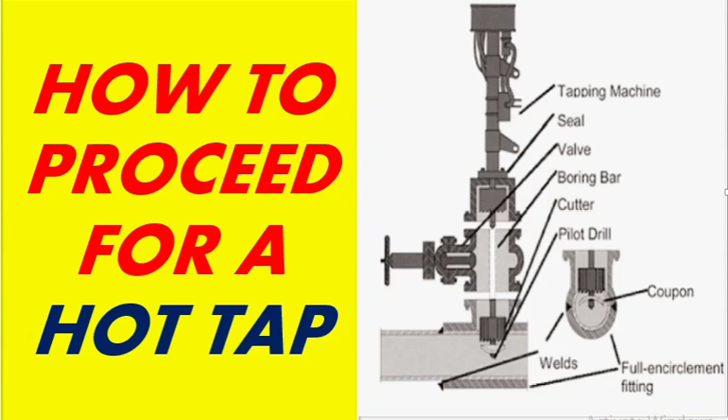So this is stopple split tee. We are using specialized fitting with dimensional requirement to suit stopple plugging head. A regular full size split tee will not be acceptable. And the third is the very important sandwich valve.

What is sandwich valve? A special gate valve with a short face-to-face dimension. One special gate valve to stop the live condition or the flow to the other area. They are also used for hot tapping when the connection will only be used temporarily and when the reach of the hot tap machine is insufficient to complete a hot tap through a conventional valve.

This valve cannot be operated unless the pressure is equalized across the gate. So pressure should be equalized across the gate. Then only we can use that valve. So this is sandwich valve. You can see this one, the sandwich valve.

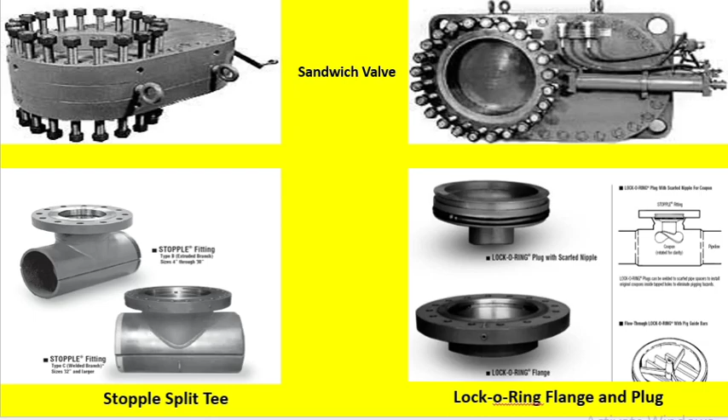So these three things are important in the hot tap. One is the lock-o-ring flange and plug. Second is the stopple split tee. And the third is the sandwich valve. These three are very important. What are they used for? You can see here, it's mentioned.

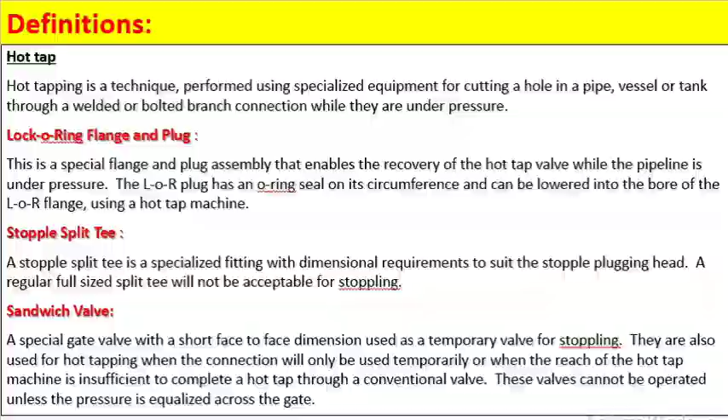So step one, you are an inspector and you are doing hot tap. What is step one you have to check? Step one is the initiating organization shall prepare a design package for each hot tap that will include fully dimensioned drawings, a material list and welding procedure. Definitely this step one is very important. A design package should be there in hot tap.

In this design package, what will be there? One should be the fully dimensional drawing of each material like gate valve, split tee, or lock-o-ring, everything should be there. And also the hot tap area, in which area you have to do hot tap, that dimension is also very important. So everything should be there in the drawing.

Second is the material list. What are the requirements before you are doing the hot tap? There should be a material list. And third is very important, welding procedure. How to do the welding there? The welding procedure approval should be there definitely. If it is Saudi Aramco, the approval should be there from the CSD. So the welding procedure is very important.

So three things are very important. One is the dimensional drawing, second is the material list and third is the welding procedure. So this is the requirement of step 1.

Step 2, what do you do? Inspect and determine the minimum pipe wall thickness at tie-in weld areas by continuous UT scan along the line. So you have to check the thickness of the pipe at the tie-in weld areas. Where is the tie-in weld? In that area the pressure will be increased or decreased. So definitely the pressure will be increased.

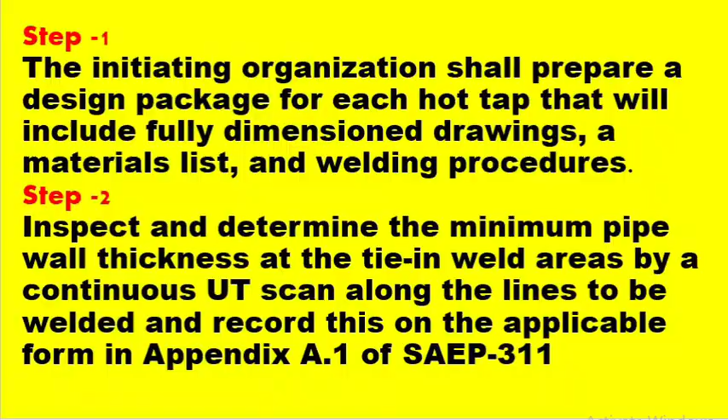So this is the applicable form. Now you understand step 1, step 2, and this is the applicable form for the ultrasonic thickness requirement.

Now step 3: the responsible engineer, SAPMT, meaning from Aramco, shall prepare a separate form SA-7627-ENG for each hot tap operation. Each hot tap operation means there may be many hot taps, so for each hot tap there is a form, Aramco 7627.

The responsible engineer from SAPMT will prepare that form for each hot tap operation. You can check it in SA 7627, but it is applicable only in Saudi Aramco. In a different country, a different client will have their own, but definitely there should be a form: the hot tap stopple reinforcement calculation request.

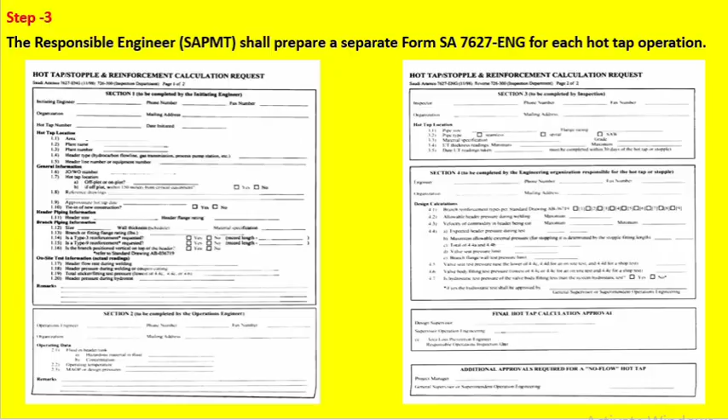Now step 4. What will be step 4? Form SA-7627-ENG has 4 sections and shall be completed as given. So how do you complete each section? Section 1 is the responsible engineer; who the responsible engineer is, is mentioned there. Section 2 is the operations engineer.

The operations engineer is mentioned. Section 3 is the responsible inspection unit. Who is the responsible inspection unit to perform this operation? It is mentioned in 7627: operational inspection for UT. Section 4, operations or project engineer, what are the responsibilities of the project engineer. So if you check 7627, this form has 4 parts.

Now this is step 4. You understand step 1, step 2, step 3 and step 4. Now step 5: prepare the hot tap package, which shall include the following requirements. First, completed form 7627-ENG, hot tap stopple and reinforcement calculation request.

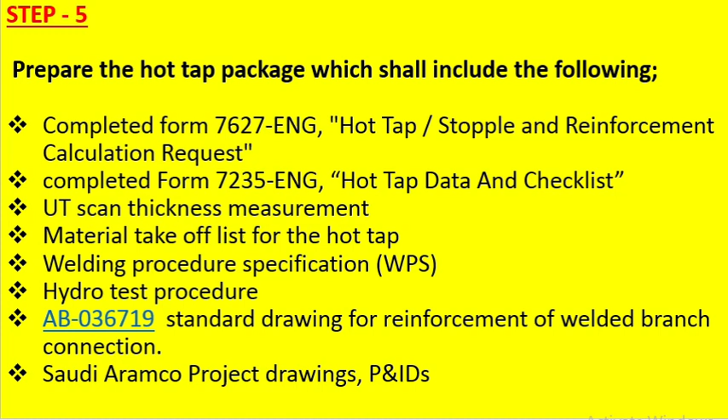You have already prepared the hot tap package, now it is completed. Step 6: the contractor shall do the following. One is site preparation, meaning safety management and preparation: safety requirements, quality requirements, barricades, everything.

Second is split tee mobilization from the yard to the actual operational area. Third is split tee installation. Next is welding of the split tee. Once mobilization is finished, you install the split tee, then do the welding of the split tee.

Split T, you have done the welding. Testing of the welds, MPI or dye penetration. You need to do the testing of that particular weld of the split T by MPI or dye penetration. And 6 is hydrostatic test of the split T with valve. So these are what the contractor shall do. They need to follow from 1 to 6 step by step.

One is the site preparation. After the split T, you have to do mobilization from one area to the actual operational area. Then you have to mobilize the split T. Then you have to install it at the area where you need to hot tap. Then welding of split T.

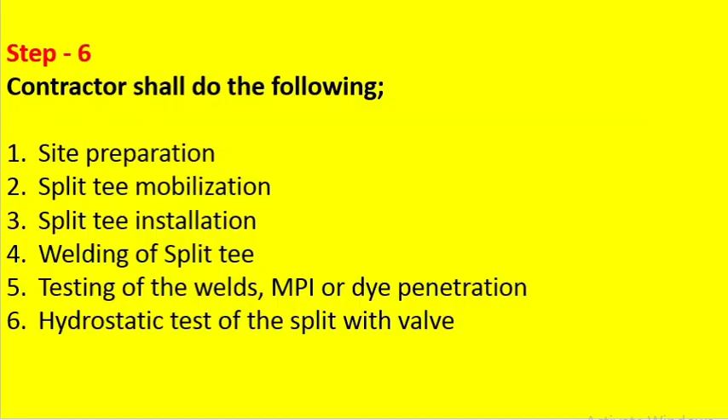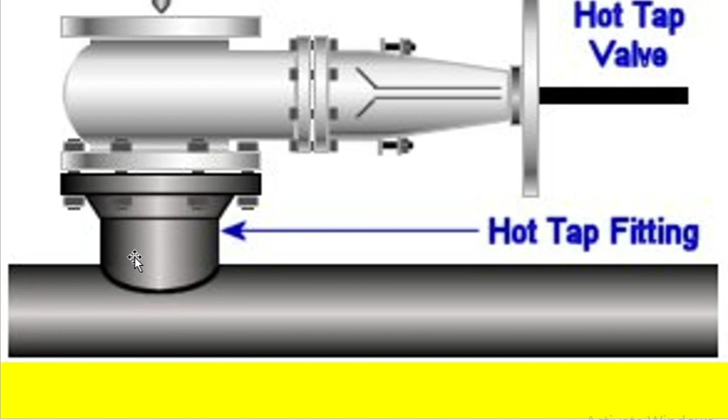Now you understand step 6. This is the step 6 details, how we are doing the welding, and you see how it looks like. This is the hot tap fitting, and this is the hot tap valve. This is the full types of valve. Full valve is there. This is hot tap fittings. After finishing this one, it looks like that. So step 6 is completed. You understand up to step 6.

Now step 7. After completing the hydro test of hot tap fitting together with valve, hot tap data and checklist 7235 shall be filled and signed by the operation inspector. So you have completed step 6. All these things are already in position. You have to start for the drilling. So before starting you have to check with the operation department, because this area is actually controlled by the operation unit. So the operation inspection unit will check everything, the data checklist, hydrotest, hot tap fitting together, everything is there.

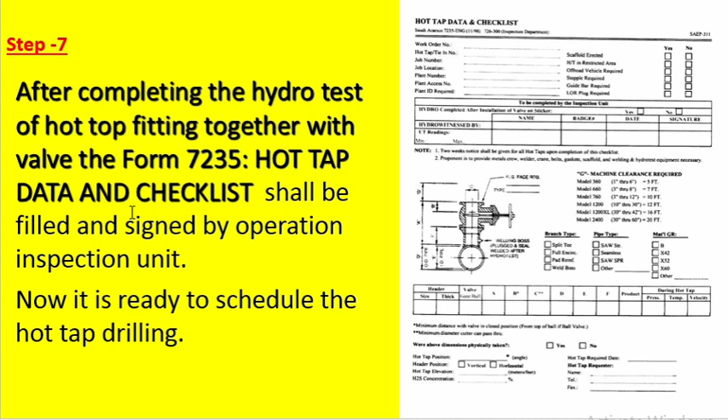So the inspection unit will sign and tell the field area inspection department to get ready for the schedule of the hot tap fitting. This is step 7. So you are now ready for hot tap fitting. Before that, step 8 also you need to check. After installation of the hot tap machine, everything is installed. What you have to check? You are ready for drilling. What you have to check?

A final leak test before the hot tap operation. A final leak test of the entire assembly, whatever the branch connection assembly, everything is there. Final leak test should be there to prevent any accident from a safety point of view. The test pressure shall be as mentioned in SAEP-311, you can check para 13.9.1. It should be the pressure during hot tapping, lower than the expected line pressure. You have to check that the leak test pressure is less than the line pressure.

And after completion of the leak test, what will happen? A bar stock plug has to be installed in the branch connection and seal welded. In the branch connection there will be one valve, and the bar stock plug shall be installed there. And every seal weld you have to check by MT or PT test. We have to check all seal welds. So this is step 8.